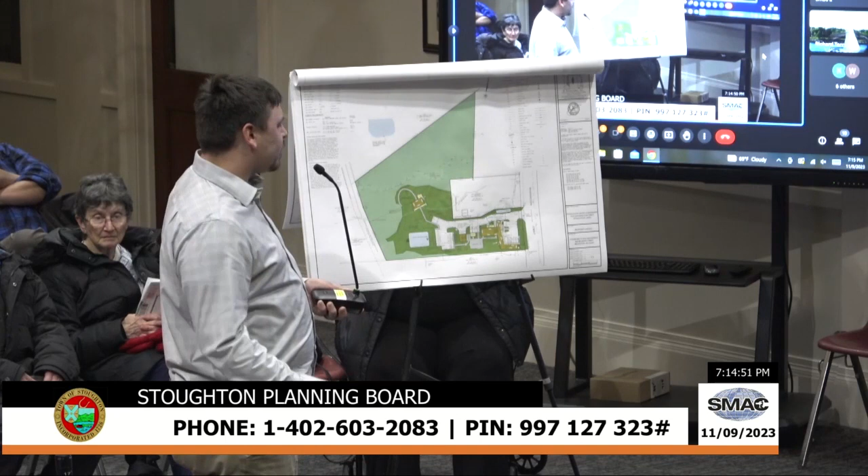People's eyes might glaze over if I start to do it, but the parking is the major change from the last hearing. There's been no other major changes other than some drainage upgrades and a little bit of grading to meet the new drainage requirements. If you have any questions, I'm here to answer them.

From an administrative point of view, do we need to have the application revised or re-upped depending on how they proceed? I took a look at that, and the way we wrote it, they requested a waiver of parking to section 6 point whatever, so it was advertised generically. The waiver to parking was advertised for the special permit, so it does not need to be re-advertised because it was already discussed—their original waiver was actually for a lot more.

So do you want me to go over some of our review? If it's okay, I'll go over mine—specific items that you need to review. Yeah, let's deal with that. Craig is online, so he can go over his as well.

As Cameron said, from a technical and planning standpoint, Craig and I both think that 1 space per unit—these are efficiency apartments, they're providing 25 spaces—we think that's sufficient. We don't want to see the entire backyard getting into the buffer and increasing impervious area that's not necessary. If for some reason it became necessary and there was an issue, we could always bring them back, and if they needed to add parking, they could always add it. But we don't see a need to add that much impervious area. We think it's sufficient, to be honest with you.

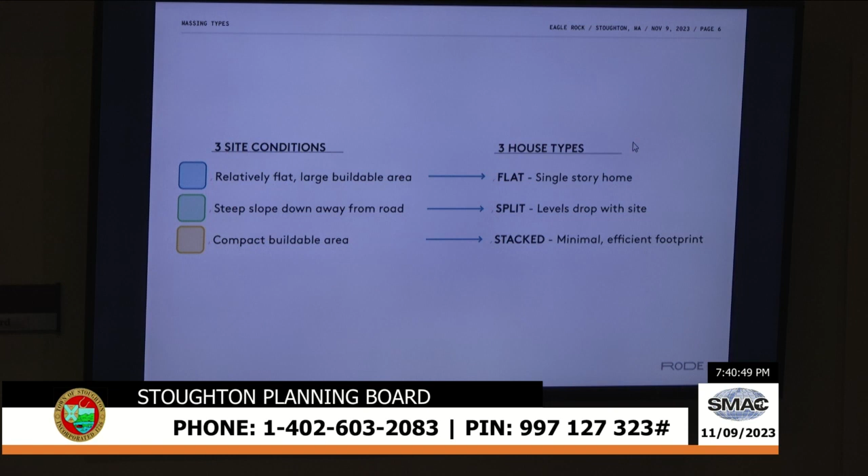This is really more of a technical drawing describing what a passive home is. It looks a little bit like the same kind of house you'd see coming up to it, but inside is a highly technical and high-quality construction process that eliminates thermal connections through the envelope of the building, with extremely thick insulation. It's a process of certifying that the structure is actually air sealed so that there is very little energy loss through the envelope of the building.

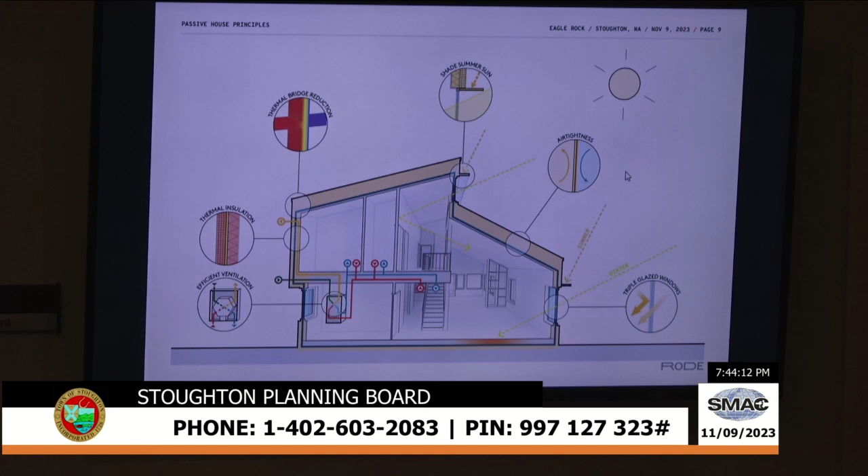Inside the building is also a very small mechanical system, so the amount of energy you need to run the heating and cooling is drastically reduced. We can probably talk even more about this, but I'll move on.

For our approach for the Eagle Rock site, the next slide introduces the 3 different types of homes that work themselves out due to the lot configuration, the topography, and access.

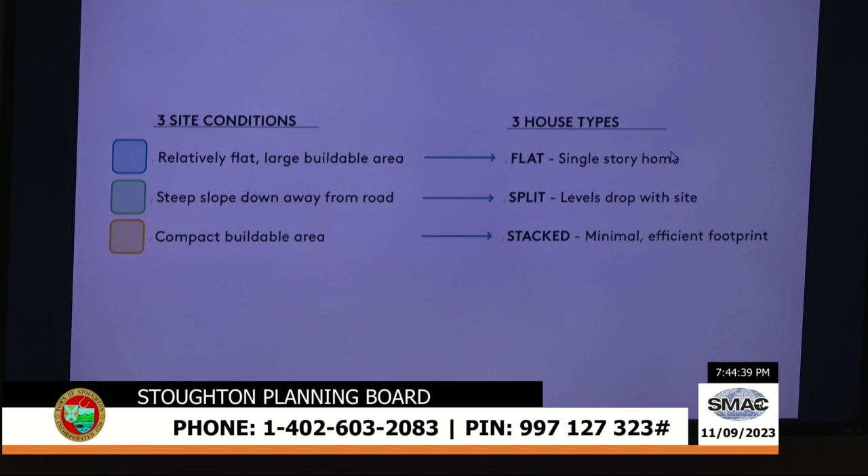Those 3 homes start to look like this. One home model is a flat, which we're calling the valley or flat house. That is for residential buyers who prefer a single-floor home. The other homes were designed to minimize the footprint on certain sites that have steeper topography and slope, so that becomes a ridge house, or a more compact footprint. The final one is the cascade or split, which mitigates a different kind of slope on the site. Each one of these homes is designed in order to minimize its impact on the natural environment.

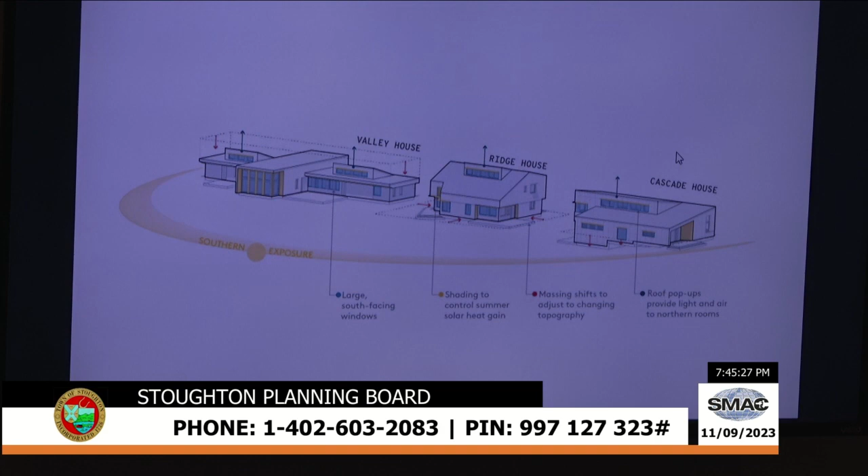Another key aspect to this development is the preservation of the tree canopy. There were a lot of concerns about the kind of vegetation that would have to be removed. We'd actually want to avoid removing as many trees as possible, so that the shade created also reduces the cooling and heating load at the optimal times of year.

We're really anxious to build on top of the experience we've had at the Bruce Wood. This would be one of the first passive home communities of this scale built in the country. These are also built on spec, since we've identified there's a market for this type of home. It's actually rare to find in the market, but we found success when we built and delivered these in Boston.

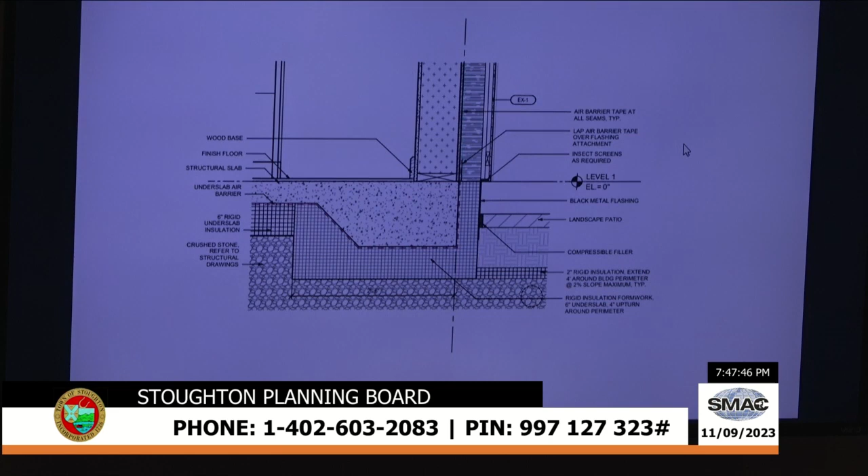So it actually uses less concrete than a typical home. In this project we're trying to find ways to really reduce the carbon impact that construction creates. So anywhere we can eliminate concrete, we will, amplifying the benefits of this type of construction.

We're here tonight, and we'll hand it over to Mike to talk a little bit about the civil engineering.

Yep, yeah, absolutely. Thank you, Mr. Chair. Mike Novak from RJ O'Connell & Associates. While these plans pull up, I'm going to turn so I can hopefully talk and make sense at the same time as showing the visuals.

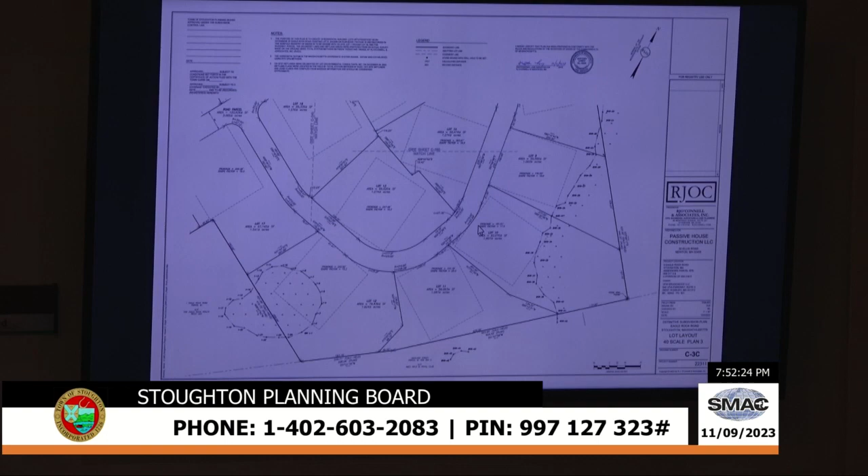So here we have some more of the detailed stormwater and grading. There are profile sheets after this, too, so you can get a feel for how the road undulates. But again, we're going to start with a high point at Phoenix and Eagle Rock, bring it down to a set of catch basins, and then start capturing.

To the northeast, you can see the outline and a test pit at the very top of the page. That's where one of the main infiltration systems is. We're using typical Cultec or StormTech plastic chambers, creating and capturing as much impervious, or all the impervious from the roadway as we can, getting it down and infiltrating. We have witnessed soil testing for drainage within that area and the other area that we're proposing. So those have been witnessed and are included in the end of this plan set.

And you can see as you work down the roadway, you can see some bypass pipes where we're taking what is currently flowing from top to bottom, or from east to west as we look at this, and just bringing that water through and letting it continue down its natural path. Anywhere that it's not passing impervious, we're letting it flow. Any impervious is being captured through a roadway system of catch basins and manholes.

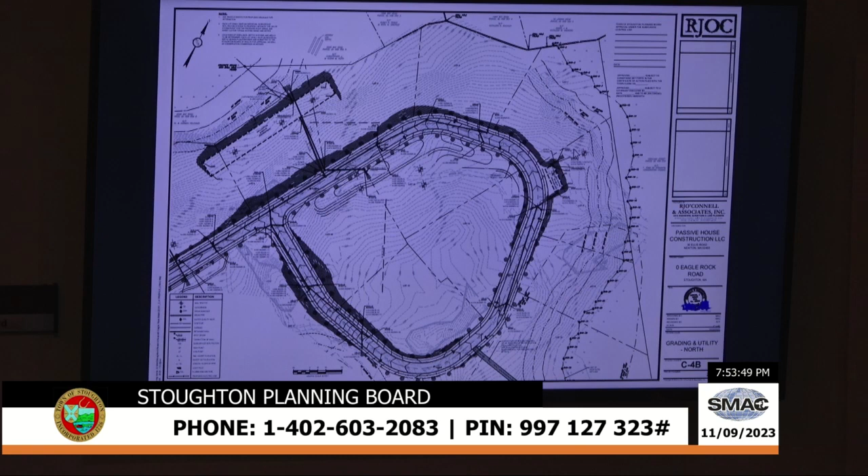If you could. And again, same concept, going around the loop. You can see the internal loop on the west side has sort of a detention basin, just a slight depression, just to kind of bring all the water to one spot and slow it down and bring it through down to the wetland to the west. And as we come around, you can see that right there where the cursor is, there's another small infiltration system just to capture what we couldn't quite get around to the big one. Again, witness testing in that area shows that we have the soil capability to do that.

And then we also have, just on the bottom of the page, you can see that there's an easement there. That's actually an access for some mitigation, wetland mitigation and plantings that's going to be done as part of some slight filling of that very small wetland. Remember at the front, we're going to fill that to allow the lot to function, and then we're going to replicate. I think we're at least 2 to 1. We might be stronger. But that's just an access path to get that work done.

How much land are you replicating? I don't have the exact area. It might be on the plan, I just can't see it at this scale. But it's part of the conservation package, and it's a very small area. So we're more than 2 to 1. We might even be pushing 3 to 1 in terms of replication area.

What kind of slope do you have on that road over there? From memory, I'm not exactly sure, so I'm going to have to look. We obviously tried to stay within every required slope for that, but I don't think we're going to be able to see a profile on that scale. And I'm going to not lie to you, I don't think I'm going to be able to see it because my eyes are starting to go.

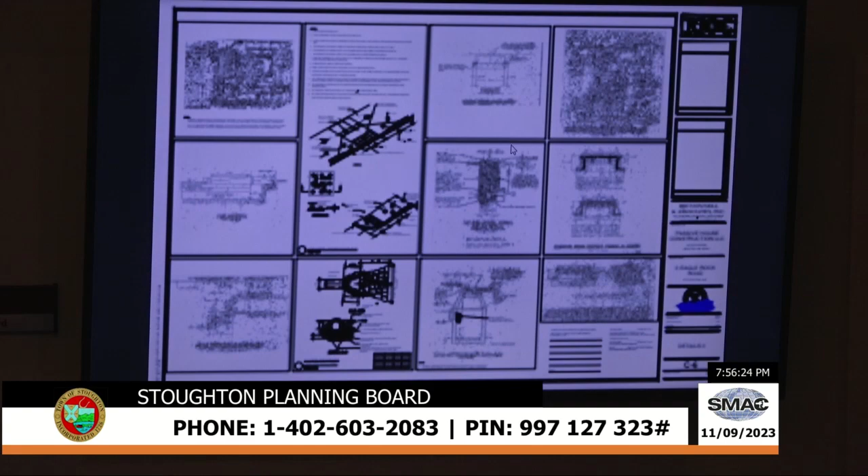Over the last week or so, just a quick point of reference, we also did Board of Health witness testing for septic as well, and we were able to find a very good area for soils too, that would certainly support a community system at the least. I was going to say, what were you doing with septic? Because there's got to be a lot of rock up there.

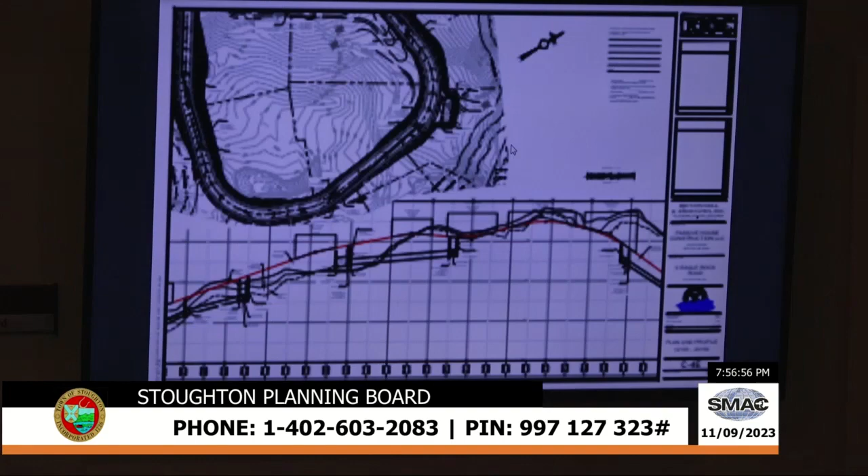Yeah, well, actually, if we could come back a couple plans, I'll show when. Oh actually, yes, I'm sorry, we did create one. This is good for now. So the top of that sheet, to the right of the infiltration system, northeast, right in those two lot areas, we conducted soil testing, and we got down to over 100 inches of naturally occurring material. The worst perk rate was 8 minutes an inch. How much? 8. So we actually found some good stuff, which will also help keep the system relatively decent size. So we should be able to fit that without any issues.

Sorry, my voice is going. I'm going to turn this over for a second, here to answer any questions. Thank you, Mr. Chair.

Bill, maybe if you could put up the colored slide from RODE's presentation. The one thing I wanted to point out, which Kevin touched on, is the color of the overview of the subdivision. Keep going, keep going, keep going. That one there, Bill, thank you. And Kevin, maybe you could just touch on, we showed the different style homes and the reason for those styles. That plan is color-coded to coordinate with, and you can see in the upper left-hand corner, based on the relative topography of those lots, that's why those lots are color-coded to indicate what type of home is intended to be constructed on each lot. You just want to touch on that briefly?

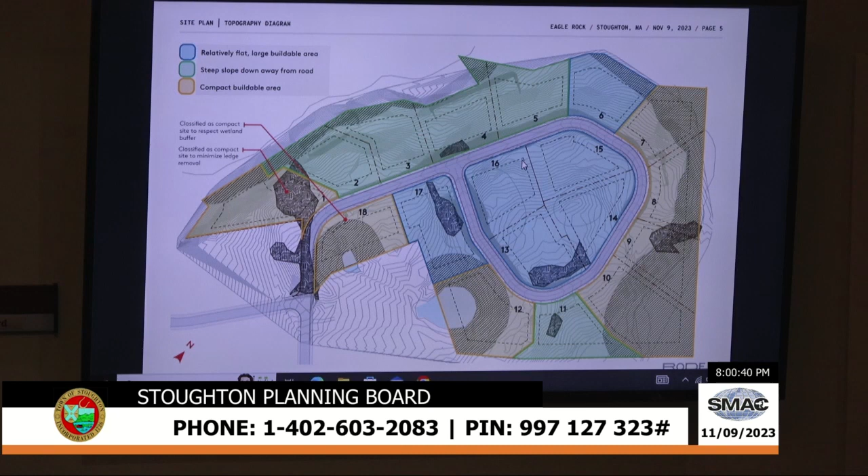And the blue ones are the flattest sites, and again, where we find a need in the market for single floor homes, people who want a large home of 4 to 5 bedrooms all on one level. So that's an age-in-place type of way of designing. But we also talk about this because of the site-specific kinds of home development. We really want to contrast this from custom home building that eradicates all trees and creates big lawns. That is really not the approach here. It's about saving the trees, making sure that tree cover is there to allow the systems to work, and for these to be passive homes. These will appeal to people that want to live that way and also understand their carbon footprint as they live in these places. So I hope that explains the color coding and the process we went through.

Great, thanks, Kevin. So with that, Mr. Chairman, I think this gives you folks, and hopefully the folks who are here, a pretty good idea of what it is that we're proposing. Again, somewhat of a unique design, certainly something that really hasn't been seen in this area previously, and something we think the town can really be proud of and point to as really cutting-edge design.

I would just like to reiterate what Kevin alluded to, which is we're maintaining as much of the canopy as possible, really just clearing enough to locate the homes. The homes are designed to be built without basements, so we're utilizing the natural topography and natural resources that are already out there.

With that, I think we'll turn it back over to you, Mr. Chairman, and see if you and your members have any questions that we can respond to. Bill, do you have any comments at this point in time, or does Craig? I'm going to let Craig talk first. Go ahead, Craig.

Thank you. Yeah, thank you for the presentation. You know, I really do think this is a unique subdivision, and I'm pretty excited about the innovation that's being incorporated into the home design.

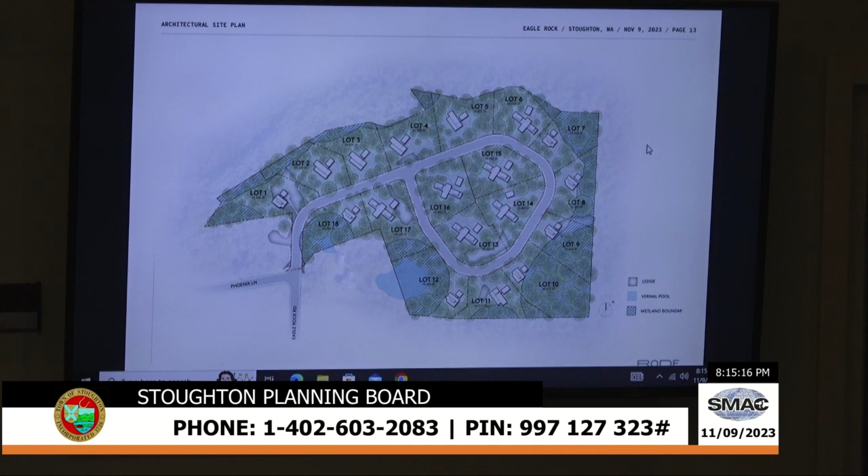So how would you describe this canopy? Is it a mature forest or initial? I haven't seen the site, so I'm not sure what level it's at.

I think the amount of ledge that's there is typical of a lot of different sites in and around Massachusetts, so gigantic trees haven't sprouted up here. The caliper seems to be anywhere between 8 to 10 to 12 inches. They get pretty big, and those are hard to remove, so we won't remove them if they don't have to be.

So can it be like 80 to 100 feet tall with oaks and pines? I would say very heavy in oak, poplar as well. It is very deciduous, and it changes quite rapidly or drastically at different seasons. We visited in the winter, spring, and summer. We've had a very obviously wet year this past year, so it is very dense right now.

So again, with the computer models, we understand how to model that. That's why we went out with the instruments during peak summer condition.

Now, do you also have covenants that restrict detail as to what type of landscaping people can do or maintain around their houses - amount of grassy area, how much has to be naturalized, et cetera? And that, maybe to Bill's concerns and questions about a community - I mean, this is its own community.

Can anybody from the team respond? Mr. Chair, through you, I don't know if a visual might be helpful. Go ahead, which one would you like up? I think sheet C4A would probably be the best one. Once we have that visual, I'll try to interpret the question and give an answer.

On this sheet, as you follow the road as it takes its turn to the north, right there, there's a small wetland—it took 4 flags to flag it. It's technically an isolated wetland. Your conservation agent actually picked it up in the field with our environmental specialist, and they flagged it with four flags. With the grading and everything we're doing for construction, we're going to fill that small isolated wetland, and that's why we're replicating it in the back. We have the area on the plan, I just can't read it—apologies for not having it larger. But again, it's less than a hundred square feet, it's not what someone thinks of as a large pond or wetland.

So your road's not crossing it, but you're infilling an area, and then you replicate that in areas outside. Correct. And then the other question, the septics—if we go to the next sheet, 4B, the septic is in and around the lots.

Actually, if he has it—do you have this? At the end of the RODE package there's a septic sketch, if you could pull that. Sorry, we probably could have done it with both sheets, I apologize for not.

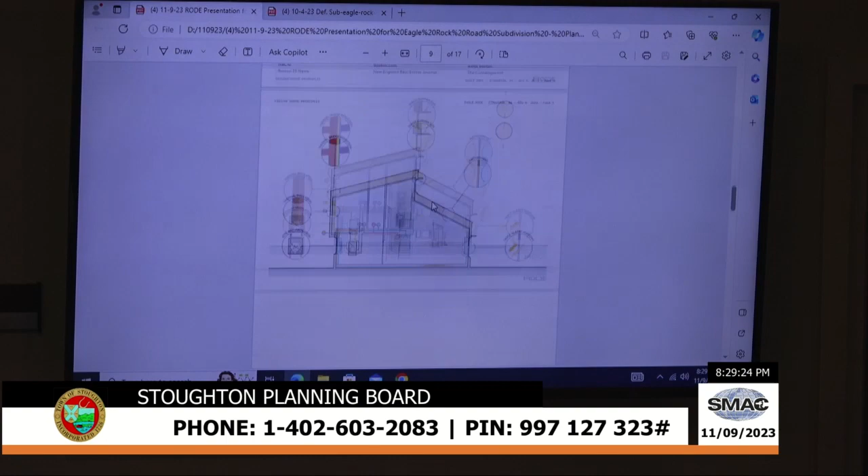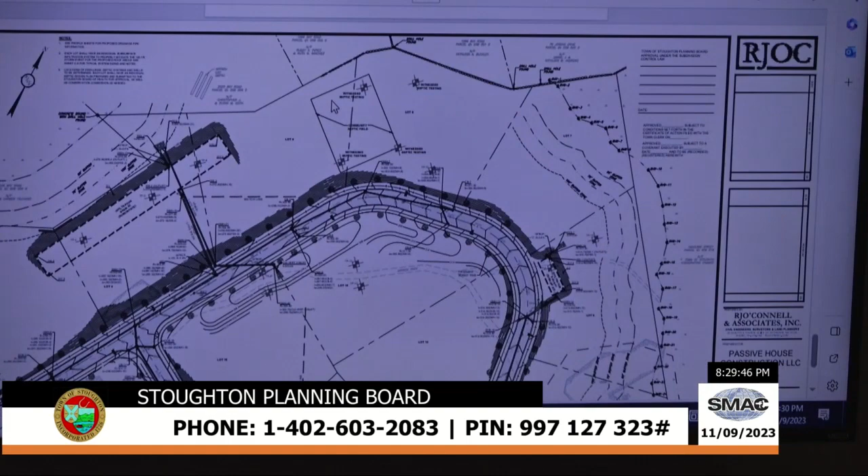So those lot numbers are, I believe, 5 and 6. That box shown right where your cursor is, is the rough sketch area of what the community septic field would look like, and those four cross-hatched bullseyes are where we did the testing. So you can see we've got some area to work with. You could also notice that we're well outside of both 100-foot buffers, to the plan right and plan left, and there are no wetlands there.

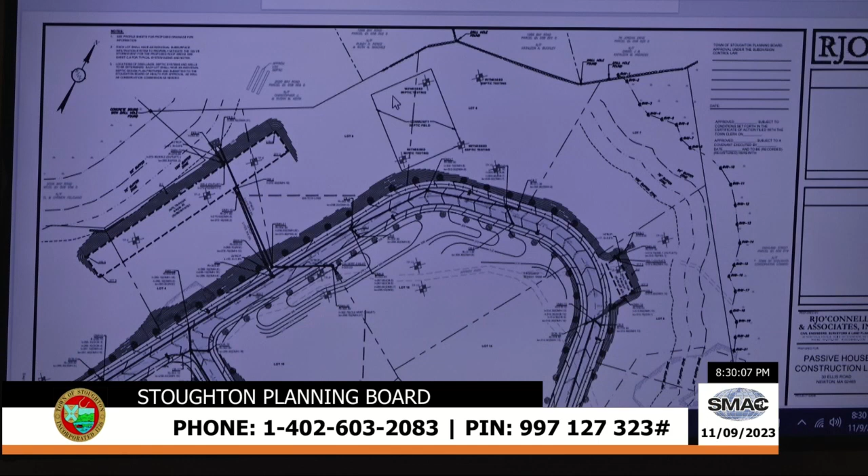I think when you first described it, your cursor might have been somewhere else, so maybe I misinterpreted that—that's where I got lot 7 and 8. So I do see that now. Thank you. No problem, thank you. I think those were the two questions. Okay, thank you. Is there anybody else that would like to speak at this time? Yes, Mr. Mullen.

Bob Mullen, 19 Clover Lane.

I just want to make a comment that I agree with the town planner that if the roadway is not up to the specs for the town, there probably should be in the homeowners association agreement that it stays as a private way, because otherwise you're going to have problems having town meeting accept it as a public way. Thank you.

Thank you. I'm not speaking for town meeting, but that usually comes up at town meeting.

Mr. Chairman, if I could just respond briefly to Mr. Mullen's comment, and Bill, correct me if I misstate your position. I don't think he was saying that the roadway would not be up to town specifications. I think Bill's concern was more relative to the idea of the town assuming responsibility for the community septic system. It was not that the roadway would not be constructed. I think he stated drainage — it's the drainage of the roadway, the underground drainage, and the community septic.

Okay. Obviously you're wanting a waiver on width, which I think — we pave too much of the world anyway, just like our last project. But in the cross section and those sorts of things, you're going to meet our standard. You're going to meet the 2 inches and then the 1.5 binder. You're going to meet all of that.